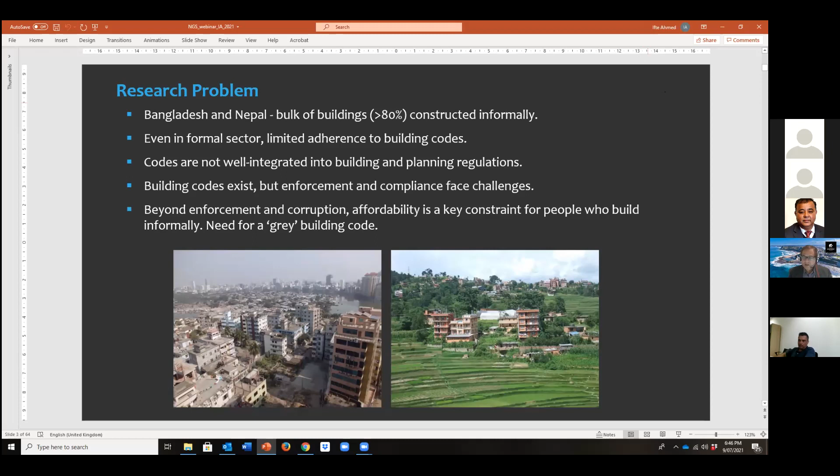So I will talk more about this notion. Our research problem was that if we now have the grey building codes, we were subscribing to what we call the safe building codes. The safe building codes focus primarily on reducing disaster risk. So if only the safe building codes are followed, forget about the rest - accessibility, green building features, electrical, fire, all that.

Fire perhaps belongs to the safe building codes as well, but water supply and other issues that come into building codes - leaving that aside for now - if you think of the bulk of people in our countries, if they could be supported to follow just the safe building codes, then they would have some disaster resilience.

The famous saying, earthquakes don't kill people, buildings do, comes into play here. Many of these disasters are not natural - I don't believe in the term natural disasters, because there are no natural disasters. All disasters are human induced in some way or another, because of our vulnerability, where we live and what we do.

You look at examples like Rana Plaza, many of you may be aware of it - the large garment factory in Bangladesh which collapsed in 2013. You can see the kind of damage, and more than 1,100 women, mainly workers, died inside it. It's about compliance - this building originally had foundations for 4 floors, and they built it up to 9 floors.

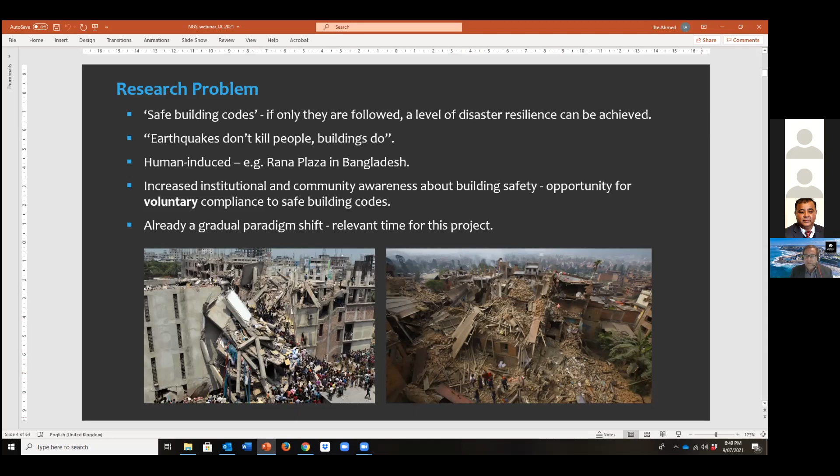This kind of augmented the awareness, and at this point I think there's opportunity for voluntary compliance, leaving aside the enforcement issue. Already there is some gradual paradigm shift, and people are following. There are certain municipalities in Nepal where there's voluntary compliance. From our studies, I believe Lalitpur had already done voluntary compliance, and recently Dharan and Timi, some of these municipalities. So you can fill me in more detail about these places in Nepal.

So why did we focus on Bangladesh and Nepal? Basically, when people talk about South Asia, they think primarily about India. Now India is a very different ball game from our countries, Bangladesh, Nepal, etc. First of all, overall South Asia has got low socioeconomic development, and the impacts in that region are profound. But what we started thinking is that the smaller countries have less capacity, less resources than the larger countries like India. So we started focusing on the smaller countries.

We had done more research projects in Sri Lanka, the Maldives, and Bhutan, and we put them all together into this new book, published last year. When we talk about disaster resilience in South Asia, we actually talked about these five countries. We didn't include Pakistan because of security reasons, we were not able to do any research there, and Afghanistan as well. But we could focus on these five smaller South Asian countries, which came out in this book, which includes Nepal. The case study in this book on Nepal builds on the post-disaster reconstruction work done after the Gorkha earthquakes.

One of the things is we started looking at some global frameworks. Globally throughout the world, many organizations are taking building codes quite seriously, disaster resilience quite seriously, from the Hyogo Framework for Action to the Sendai Framework for Disaster Risk Reduction. These have started being highlighted in the SFDRR and their framework, which encourage the revision of existing or the development of new building codes and standards. So that has become a priority in the global policy agenda. In the Sustainable Development Goals, again, support for least developed countries, including through financial and technical assistance in building sustainable, resilient buildings, utilizing local materials. So that is also quite important to understand.

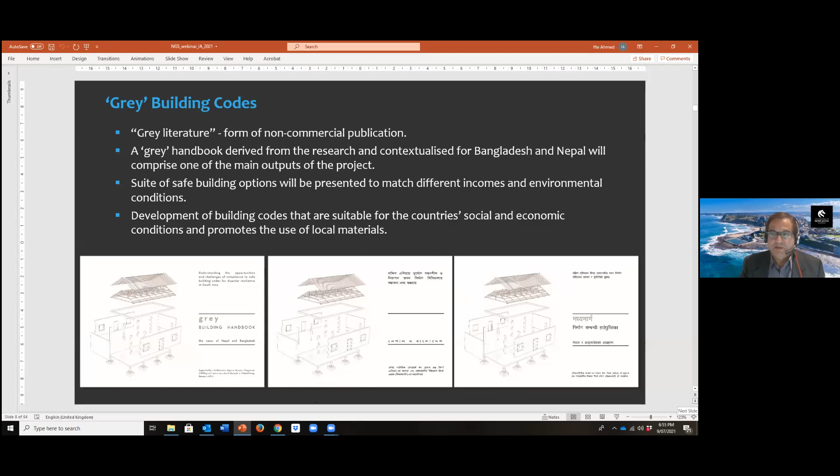So what is voluntary compliance all about? We are talking about compliance, but it is this notion that people become aware, they start believing that if they follow it voluntarily, it's for their own good. Think of it like being ill and needing to take medicine - if you don't want to have your medicine, then you get ill. So you know the medicine is actually good for you, you might as well have it. And so that is voluntary compliance.

So at night, before you go to sleep, you're supposed to follow the prescription and you have that. So that is the kind of idea we have - a very simplified version of the problem.

And the other thing is that the large bulk of the buildings are just all being done informally, whether you like it or not. And so the building code is very hard to enforce. It needs a lot of money to enforce it, to police it, and then in between there's all the subversion through corruption and all that kind of stuff.

So we need to find a very different approach to promote disaster resilience, and that is voluntary compliance. Voluntary compliance comes through awareness building, through knowledge transmission, through capacity building. So it's not only about forcing people to do things, not about enforcement regulations - it's a form of social transformation, if that's the word for it, where people have this compliance culture.

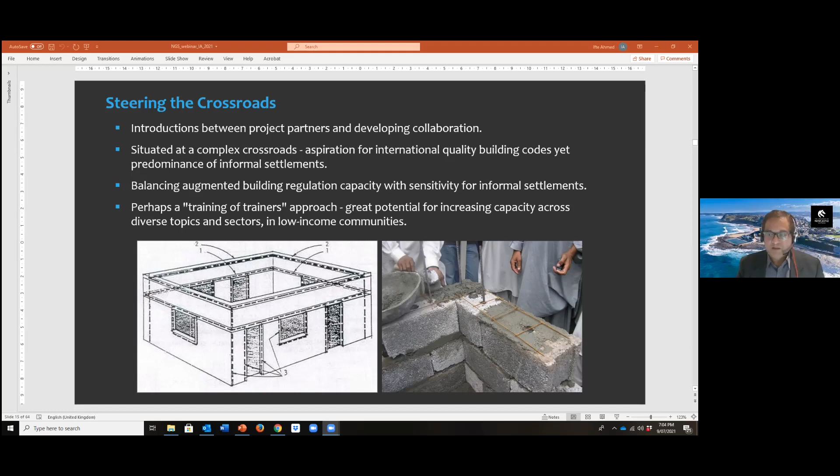Some of these ideas we had been trying to implement. This was a project we had done in Bangladesh and Pakistan after the 2005 earthquake - training of trainers for construction workers working on site, with hands-on exercises showing them the corner reinforcement technique. It was something very simple.

Awareness is one of the best tools for voluntary compliance, mainly in two aspects. One is on quality construction, design, drawings, and following the building code. That is one level of awareness, a little bit technical. Another awareness is basically the impact - what will be the impact if the building is not resilient or as per the building code. If we could do these two types of awareness programs for the people, they will realize the implementation of the building code. That means voluntary compliance.

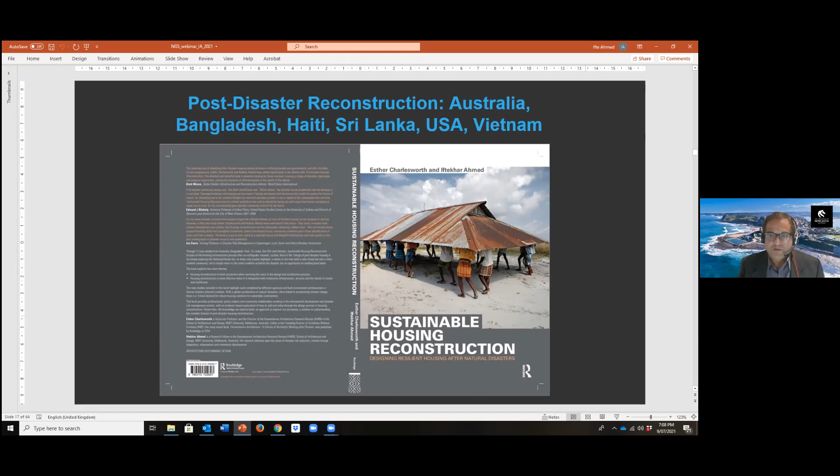This is a book that was published looking at post-disaster housing reconstruction in 6 countries, including developed and developing countries - USA and Australia, but also smaller countries. Nepal was not in this book unfortunately, and I've already talked about the disasters in South Asia book. This was also very important, as Inu had said, working on the ground, it's about community engagement. This is a book I co-edited with 13 countries from 5 different continents, covering the different aspects of how communities actually engage and even drive the process of post-disaster reconstruction and recovery.

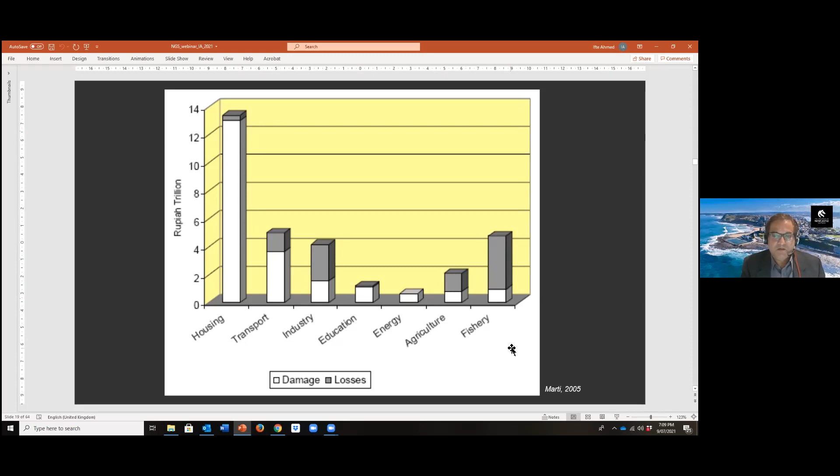So looking at housing, why is housing important? Why focus on housing? You might say safety, health is more important and all these other things. Yes, certainly. But this little study done by our good colleague from UN ECLAC, done after the 2004 Indian Ocean tsunami in Aceh, found that the housing sector experienced the maximum amount of damage, far exceeding all the other sectors - transport, education, and all that. So you can see this is such an important sector, and this is so vividly and tragically illustrated by the disasters that happened.

So looking at housing, we can call it sheltering. How do people shelter? Before a disaster, people build, extend, upgrade, they try to get money, cash, contract labor, self-help to construct and maintain their houses. Then they have the disaster, and beyond that, they will do the same kind of thing - over time they'll upgrade, extend, and build using cash and contract labor. So they will go back to more or less what they did before, unless there's some intervention. In that intervention, you start providing materials, cash, contract labor, self-help, and technical support. This is where the building codes can come in - where you say, yes, do what you were doing before, but maybe spend that little extra rupee to make it a bit stronger.

The other thing is about recovery and self-recovery. I'm currently doing a project on self-recovery in Vanuatu, a neighboring country, supported by CARE. In this project, what they found is that many agencies go and build housing for people and do all kinds of things, but people eventually are not satisfied. Things are not up to what they wanted. Agencies also have their limitations in terms of resources, time, etc., so it never matches. So many programs implemented throughout the world after disasters have met criticism.

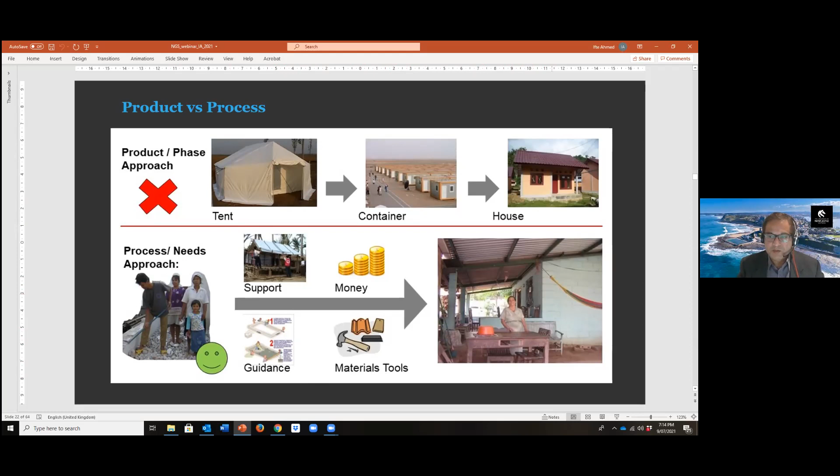So basically, it's just a little anecdote that you cannot fix a door to a tent. You have to be contextual. We have to understand where the problem lies and what needs to be done. It's not like just providing housing to everyone, a one-size-fits-all approach, but recognizing the diversity, the multitudinousness of the context.

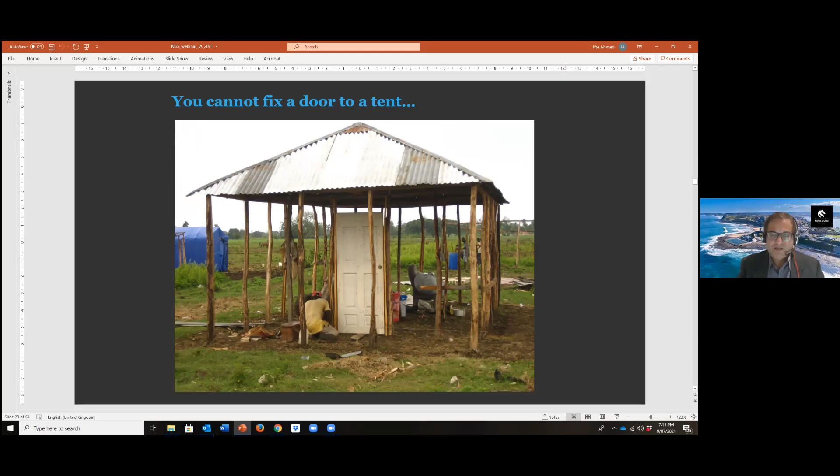Going back to what I discussed, the emergency transitional shelter issues, that photograph I took in Haiti in 2013, 3 years after the large earthquake there, when all these kinds of projects were built. The whole global NGO community descended on Haiti, everyone was there. Initially they provided tents, and you can see these tent materials have been draped around these transitional shelters. But I don't have a photograph to show here.

These areas consolidated and became urban slums, because they also didn't have services like waste management and drainage, so very unsanitary conditions developed. People were dumping garbage all around, and they were getting waterlogged and floods. But there was no way to get rid of these people, because the leap from the transitional shelter to the permanent house was far-fetched. When would it happen, and what were the resources for it?

My good friend David Sanderson, Ahmed knows him, he's written a very nice article called 'Lost in Transition.' That is what has happened in many of these countries with this idea of transitional shelter, and you may have equivalent experiences in Nepal as well.

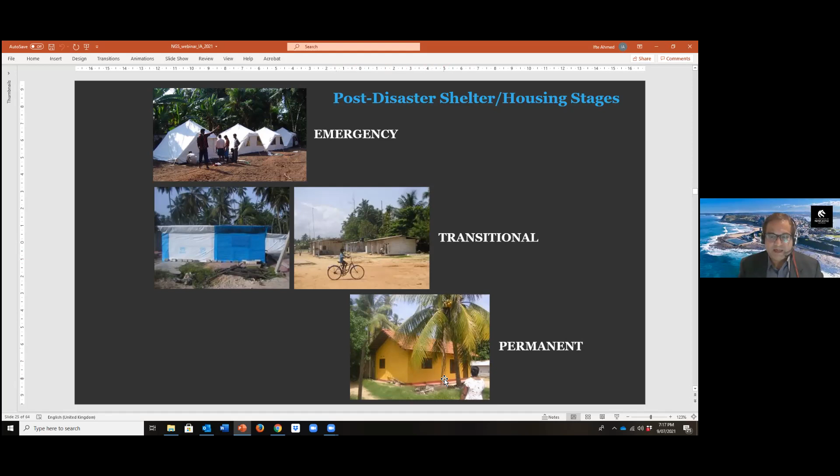It's a long process, this trajectory from disasters to recovery. It can take months to years. There are all kinds of temporary shelter approaches. As I mentioned, in Australia they're providing caravans, and some people are given vouchers to stay in hotels, but in poor countries they cannot get those kinds of opportunities.

So they get these in-situ temporary shelters or congregate temporary shelters, like that school in Bangladesh which was converted into a temporary shelter after a very large flood in 2004. People lived in that facility conversion - the school was converted, so the school kids couldn't go back to their school, and these people couldn't go back to their homes. They just kept on staying there for very long periods of time.

I'll give you some quick case studies. The first one is from Yogyakarta in Indonesia. This is a transitional shelter program, but transitional shelter need not be bad if it's thought about carefully. After the Yogyakarta earthquake in 2006, they decided to provide transitional shelter which can be gradually upgraded over time into permanent shelter.

You can see they'd built only the lower part of the wall. The upper walls were provided out of local materials, bamboo and other things. This bamboo was also very well built and treated, so it would last over the long term in case they couldn't make the transition to permanent housing. They salvaged a lot of the roofing tiles and provided the remaining ones to build these transition shelters. Many organizations did this - IOM, IFRC, and so on.

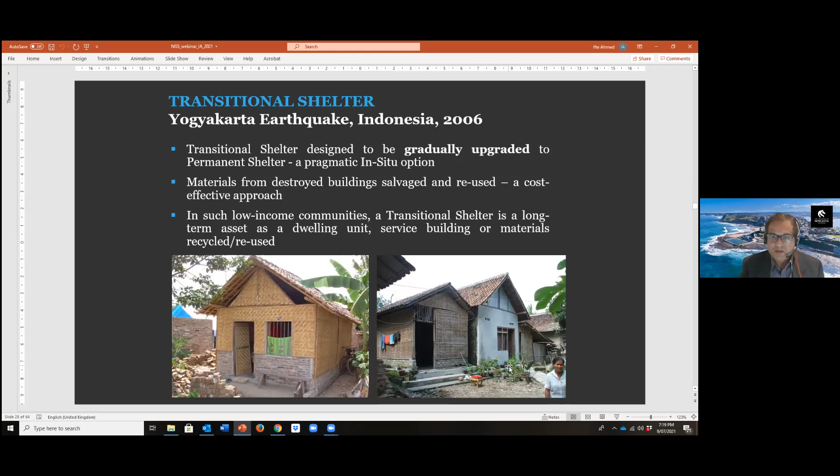Looking at a developed country like Australia, they had what they call temporary villages. This is a very uncommon idea, which was a great idea, but very capital intensive and difficult. Next month I have a conference in Australia where I'm going to talk about and question some of my colleagues in the DRR organizations there, asking why they don't build temporary housing villages.

In this particular idea, this was a sort of medium-term solution, equipped with all kinds of resources. I'll show you some photographs so you know what I'm talking about. They had everything - dining halls, kitchens, even a pet holding area, and pets are very important to people in this part of the world.

And so people could stay in these temporary villages close to their houses, and they could kind of supervise the rebuilding of their houses. They also had a building advisory service and a center. The building advisory service was dissolved after the temporary village ended. This kept the community together instead of all of them dispersing.

In many countries in the Western world, people get fed up and they just go somewhere, and the community loses its cohesiveness. In certain cases, in one of the villages, there were three of them built in Whittlesea, Marysville, and Kinglake. The one in Marysville is retained as a school camp.

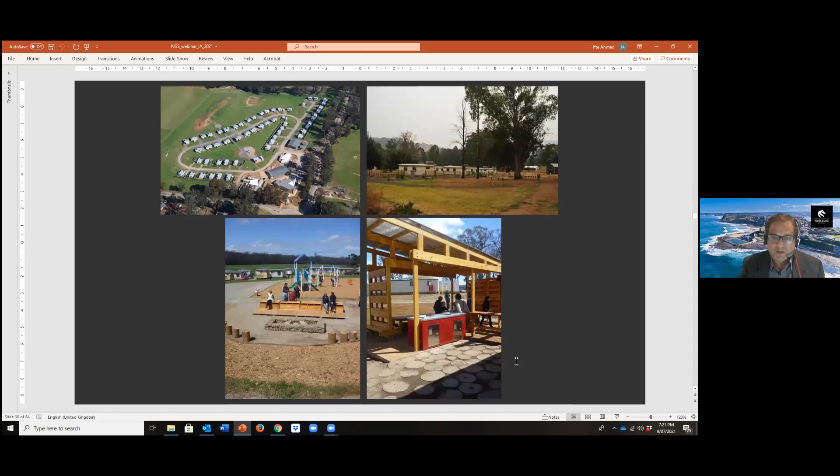Let me show you some photographs so you get an idea what I'm talking about. Here you can see the school camp, which was kept. These are very small little houses, as you can see - we call them granny flats. A granny flat is a very small house you can build if you have a large backyard, for your grandmother to live with you. They're just equipped with all kinds of things; it's a very small dwelling.

And this is what they had built. You can see the temporary shelter, which had an open area in between, and they also had a park. They had a barbecue center, built again by students from Monash University. You can see the building advisory service center, which was close by, and so on. They also had the dining hall. So it was all equipped.

After 18 months, this was all dismantled and left. In this particular photograph, it was completely dismantled because this was land leased from a farmer. But in the second one in Marysville, they actually kept it and allowed it to function as a long-term school camp.

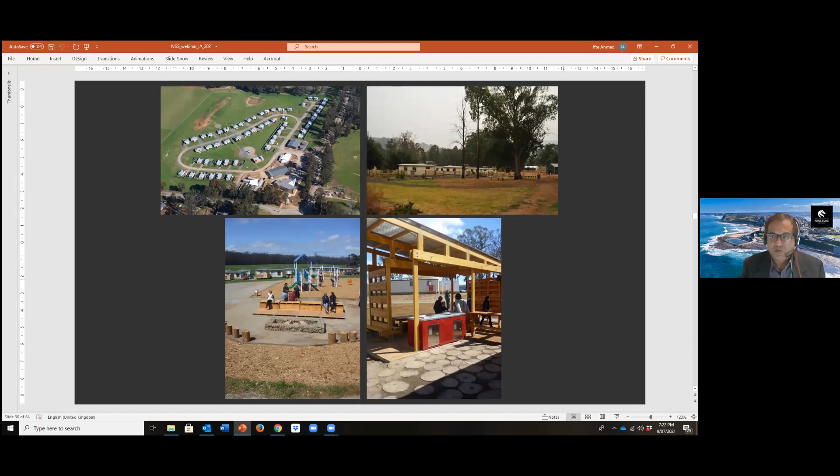So finally, we come back to housing and talk about housing recovery. I'm going to run out of time, so I'll just try to go a bit fast.

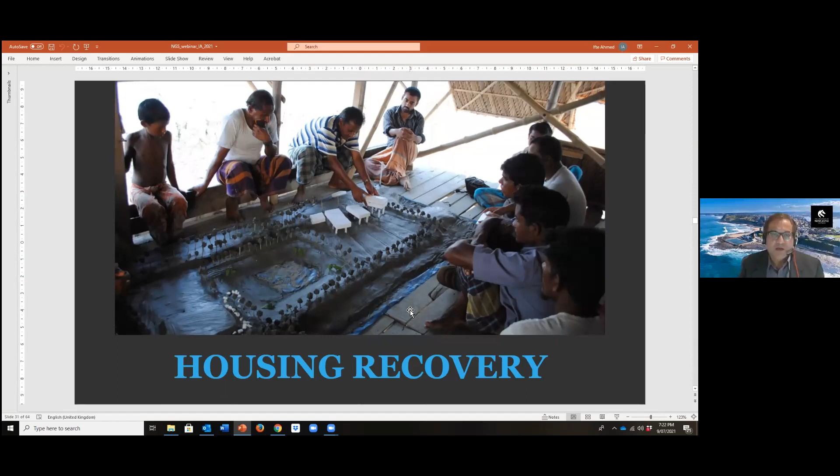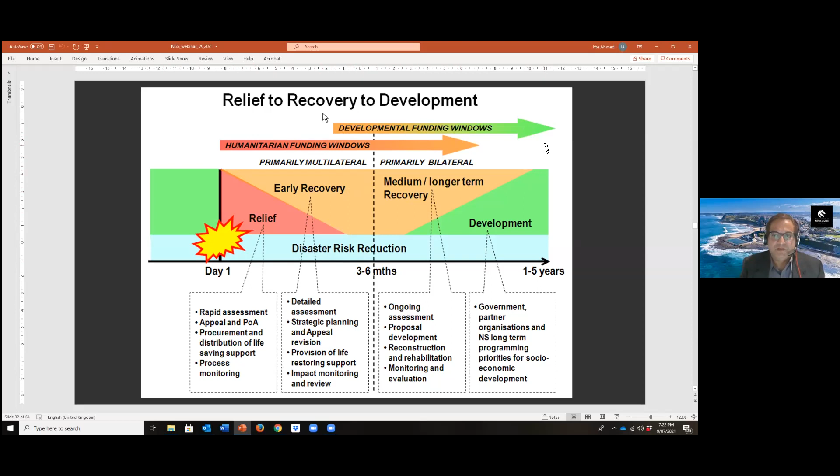Again, like I said, it's a long-term process. You have your day one, your initial relief, and two main funding windows. One is the humanitarian funding window, which kicks in after the disaster, and then the development funding window, which may have been operating before. After about 3 to 6 months, the development funding window takes over, and that grows, but this can take 1 to 5 years.

As you can see in this program - this is one of my favorite reconstruction programs in Sri Lanka, done by an organization called Foundation of Goodness, FOG. What they had done, amazingly, is that they stayed within the community. They came into being as an organization and have continued staying there and working with them - not a fly-in, fly-out humanitarian international NGO.

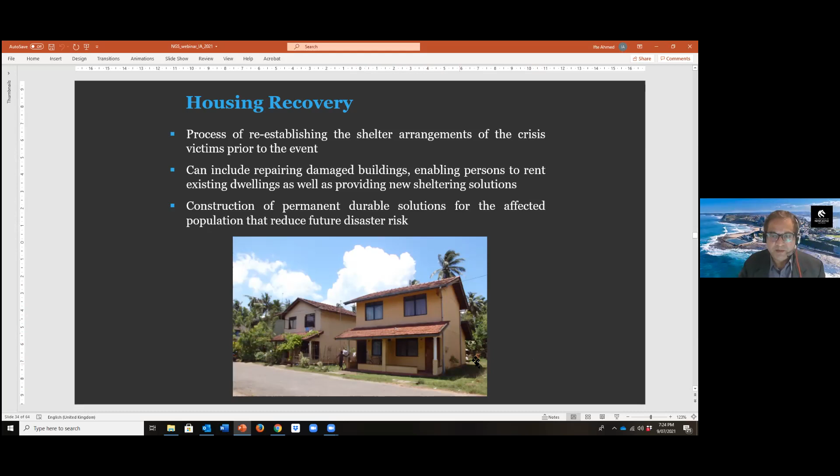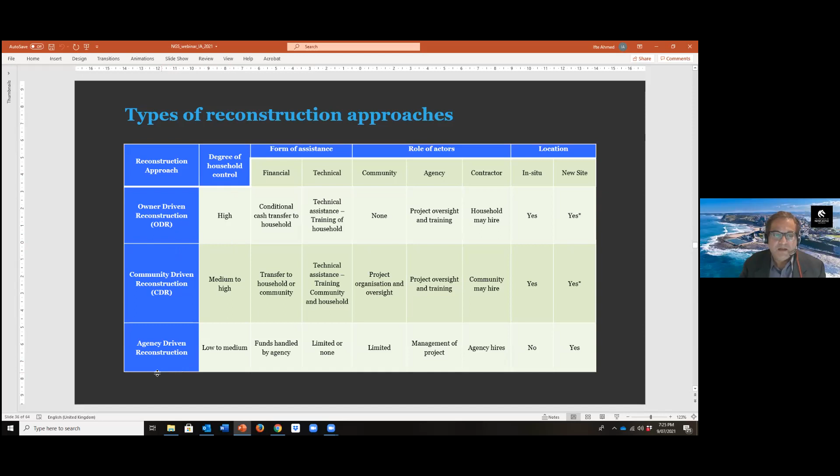Different approaches exist: the owner-driven approach, about which there's been a lot of talk of its merits; the community-driven approach, where the community works together; and the agency-driven paradigm, which is widely prevalent as well. I won't go into these in great detail, but one good thing is that the degree of control in the owner-driven approach is very high, while in the agency-driven approach it is low in many cases.

But I don't want to romanticize the owner-driven approach, because it also has disadvantages alongside its many advantages. Yes, people are satisfied with the eventual outcome, but people who have the money just spend it, or they might sell the materials they get. Quality control requires supervision, and people may feel overwhelmed or not have the right skills to participate, so a whole range of issues come up.

So we will have to balance the advantages and disadvantages every time a decision is made to take an approach.

There could be approaches that combine the benefits of both, a hybrid approach. This program is by CARE in Sri Lanka. As you can see, they had a certain design, but households could go in and change the design to a little extent through consultations, and they could supervise the construction work. This way all stakeholders could feel they had some sort of ownership.

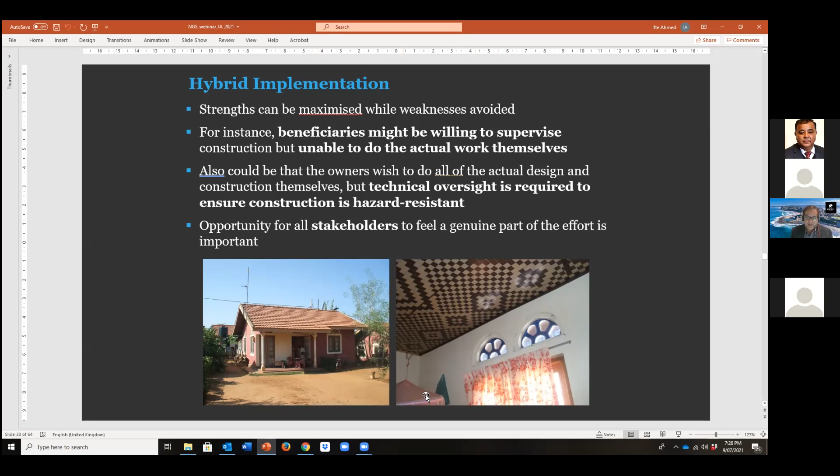In this photograph, the fan lights were included by the homeowner, because they said this brings some light inside the house - this is what we wanted. So they could influence some of the design decisions.

I probably won't have time to discuss that in great detail, but let me go on to another project in Bangladesh, where I was a shelter consultant - more than 16,000 houses were built after that very large flood I mentioned in 2004.

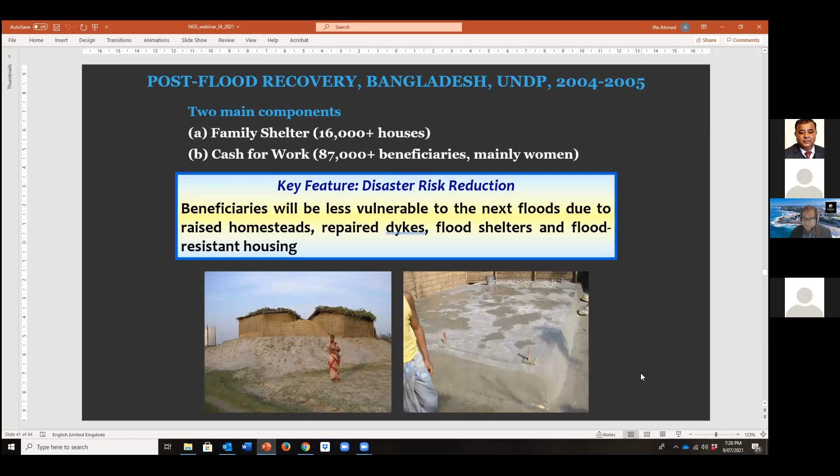I will show you a small video clip that will tell you what the program was all about: in the family shelter or house reconstruction program, we have tried to introduce techniques which would ensure risk reduction or make these houses less vulnerable to the next floods.

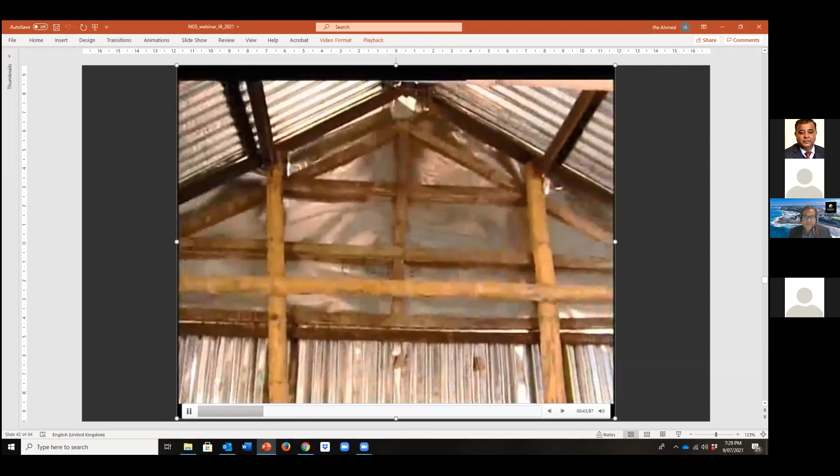Floods swallow up people's lives and livelihood. With their houses drowned, people take refuge on high roads, dams, or flood shelters. After the floods subside, a lot of them cannot find their houses since they have been washed away. To make sure that the houses of people whose lives are already difficult do not get washed away by the floods, model houses have been built in various project areas.

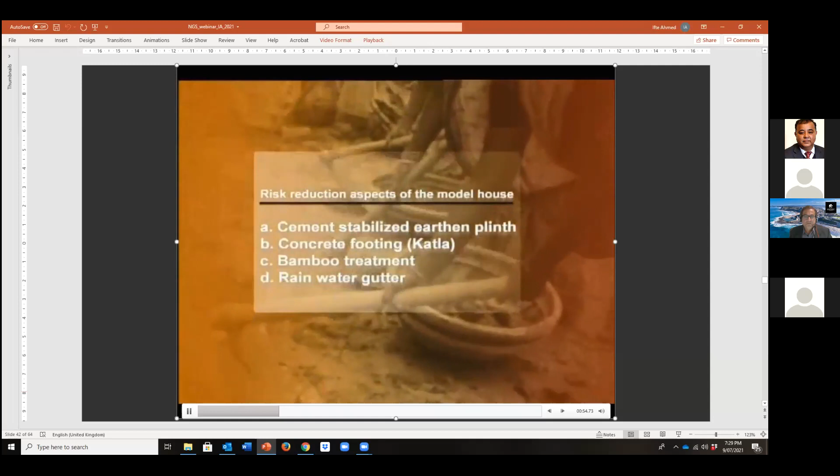Risk reduction aspects of the model houses include cement stabilized earthen plinth, concrete footing, katla, bamboo treatment, and rainwater gutter.

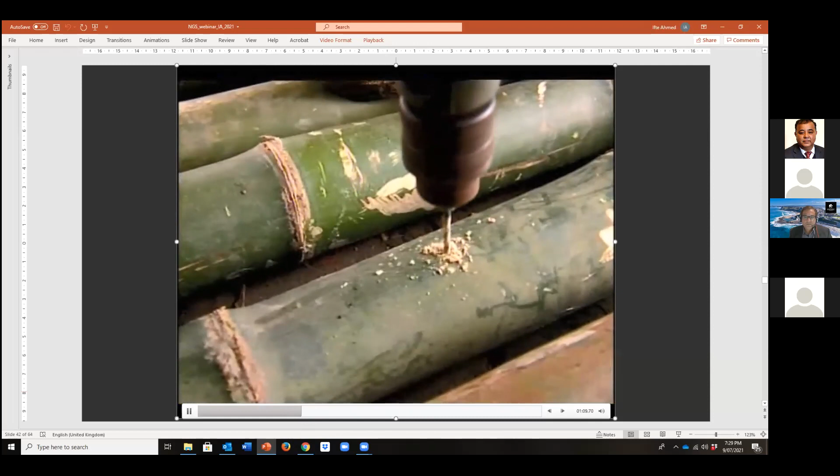Treatment of bamboos is one of the distinguishing features of this project. This protects the bamboo from insect attack and rotting. For the footing of the bamboo posts, the katla is made through local initiative.

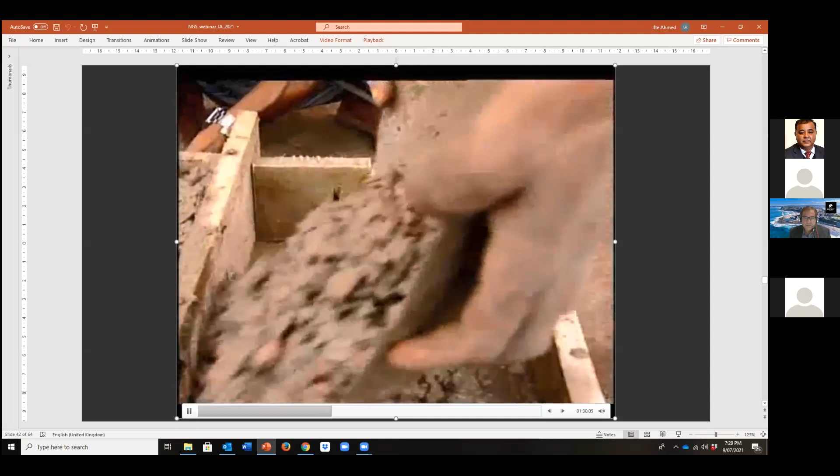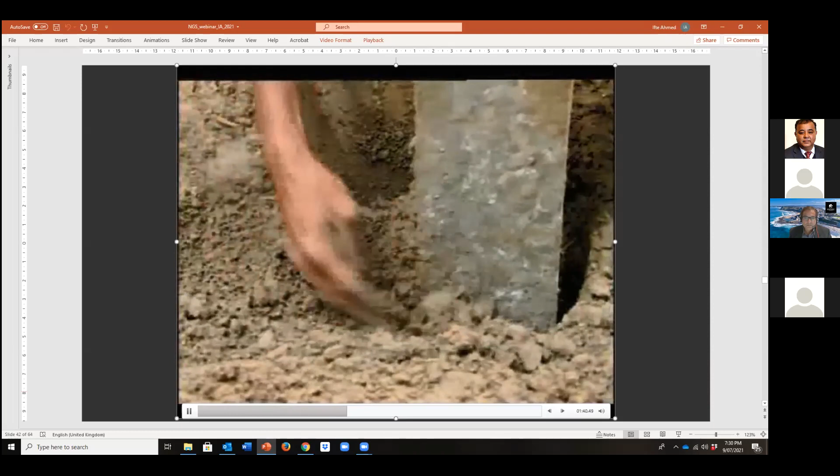A soil and cement combination in the ratio of 19:1 was used for capping the plinth of the house. This prevents the plinth from being washed away.

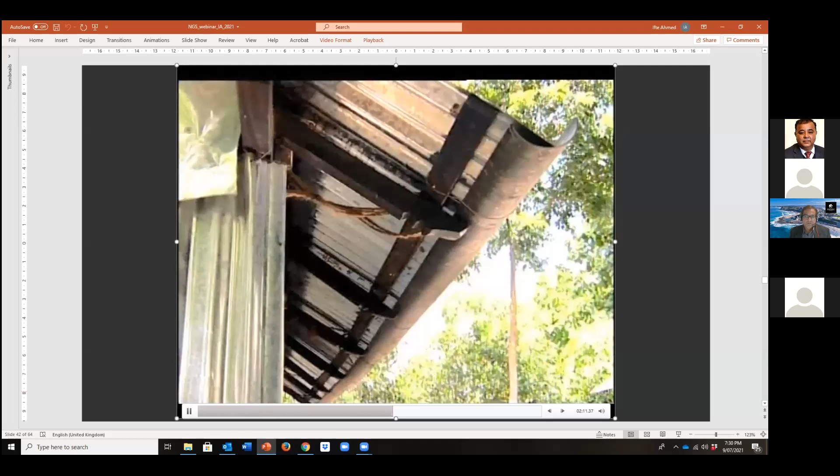Rainwater gutters made of split PVC pipes are used to prevent rainwater falling from roof eaves and damaging the lower part of the house. It also provides an alternative supply of arsenic-free water for household use.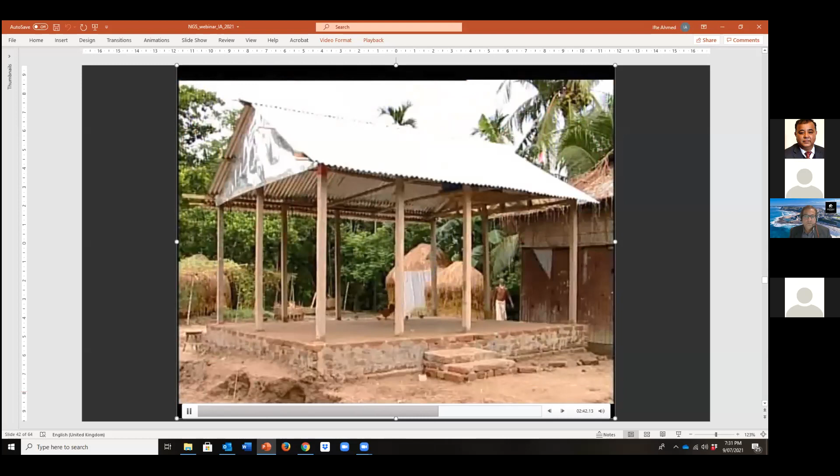16,036 houses were built in 23 districts under the housing project for the flood-stricken people. The houses differ in shape and structure in different areas depending on the quality of soil and easy availability of materials. In some areas, instead of katla and bamboo, concrete pillars made of rods and cement are used. Again, in some areas, instead of bamboo fences, metal sheet is used. No matter what material is used, it is made sure that the houses are resistant to flooding.

Certain criteria are set before nominating the people who are eligible to get the houses. The chairman of the Village Development Council plays an important role in this regard.

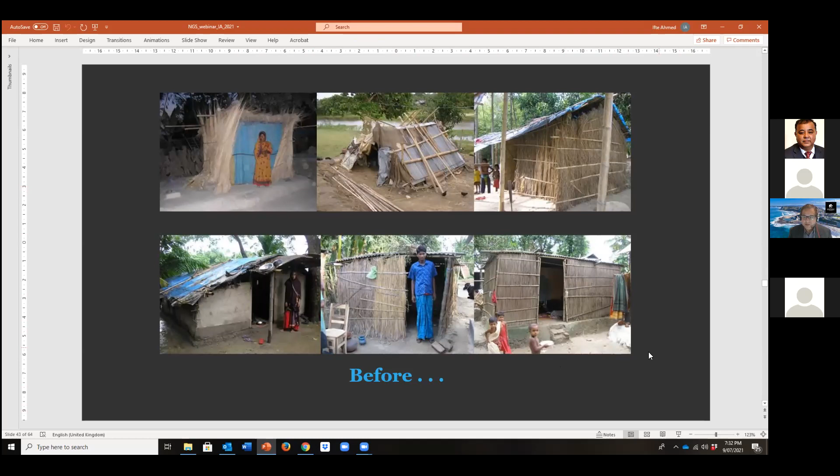And yes, you may call this self-recovery, but this was the condition. And then you can see that even though it's a modest house, it's definitely a leap from the previous conditions that people were living in.

And again, not following a one-size-fits-all approach. In this particular project, what we did was we provided specifications of certain kinds of materials, but they could have their own design, their own ideas, the kind of houses tuned to the different localities, locations, the areas, so that they use local resources and in tune with the local environment.

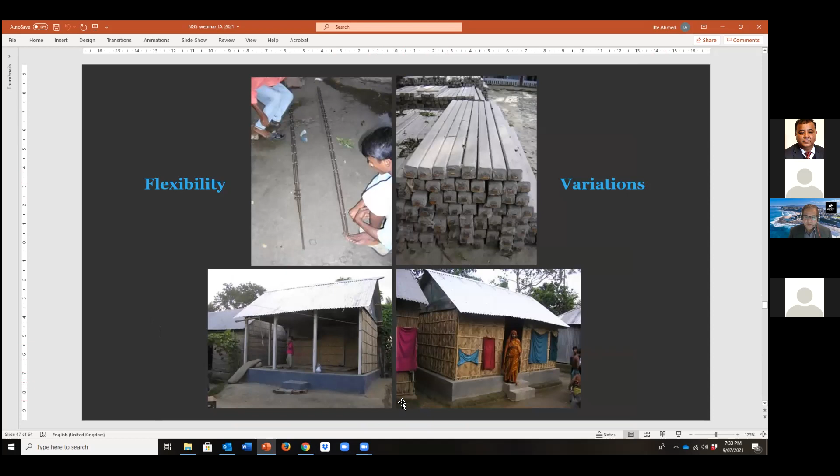And then the idea of flexibility, that they could have variations, they could use materials as they chose. Some people wanted to use concrete posts, as you can see, instead of the short concrete stumps that we provided, and so on. So you can see the variation and the variety.

And yes, that's what I meant. Instead of treating bamboo with the kind of ideas that we gave, we didn't use any toxic chemicals either, just local oils. But here they just got sap from a certain kind of tree, local to the area, that helped protect the bamboo.

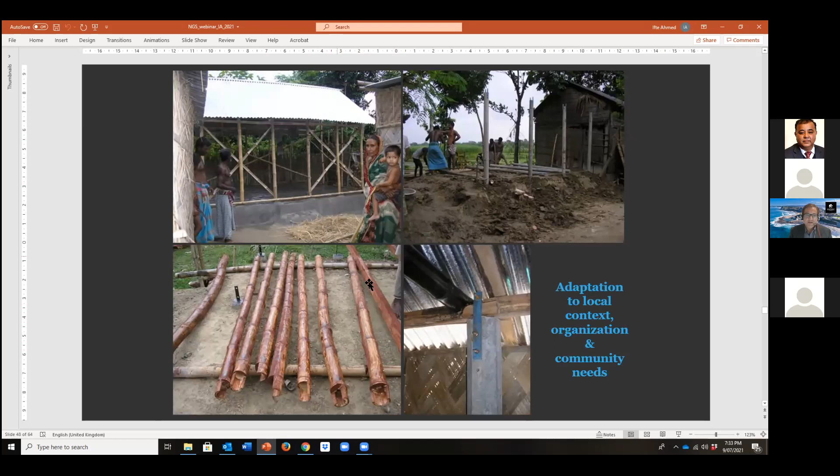So you see, they introduced cross bracing in certain areas because of the strong wind in that particular location. And this kind of project, 16,000 houses, generated employment for a large number of people who worked on the sites: building material suppliers, transporters, people supplying materials from one side to the other.

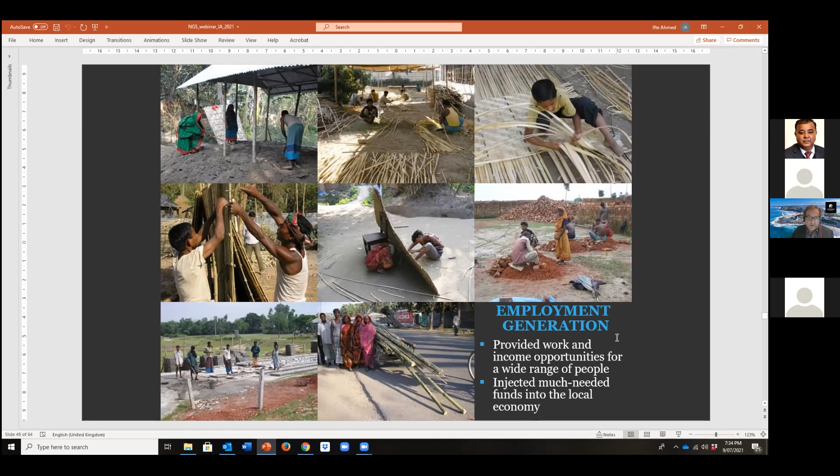So there's a lot of potential, like any other thing, it has got its problems and its potential. I won't go into great detail.

Cost effectiveness, they can build in local context, can be easily replicated in training. But on the other hand, there are many problems in the beneficiary selection process, and also the project planning, and some of the NGOs were also not very honest. And the quality control issues, this is always very important, needs local capacity building.

But this project also had a very long-term impact, and I had written about it in my community engagement post-disaster recovery book, which I showed you earlier, that some of the partner NGOs started using some of these ideas, and they had replicated some of those ideas in their training handbooks.

And here you can see the treatment of bamboo process, that they drill a very small hole and pour local oils into it. It could be anything, diesel, kerosene, whatever. And they were doing it in the Rohingya refugee camps in Bangladesh, and also after 2007.

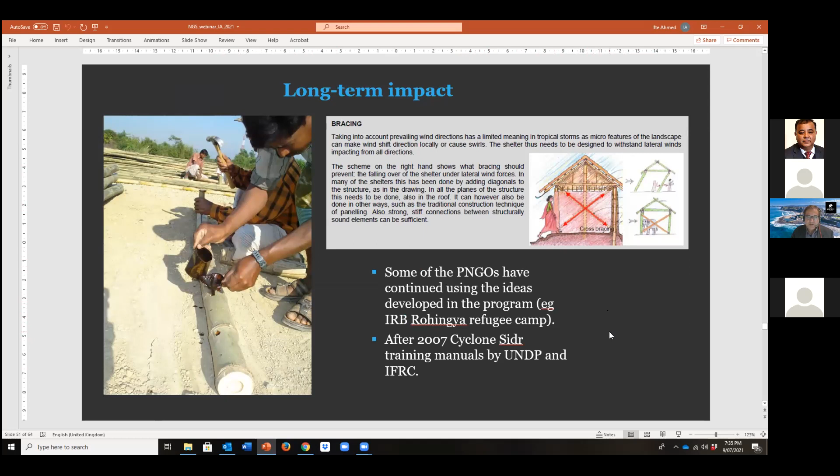So now things have changed. This project was done in 2005, and now Bangladesh has developed more. There are more brick buildings, larger houses, and all kinds of stuff.

So when I went back to one of these areas just quite recently, I found that those smaller houses had gone, and they had built very, very large houses. But they had used some of those materials, and they salvaged some of the materials. In fact, that particular juncture in time, when they got that support, helped them stabilize. Otherwise, they would be in a floating condition. It helped them stabilize to move on to long-term prosperity.

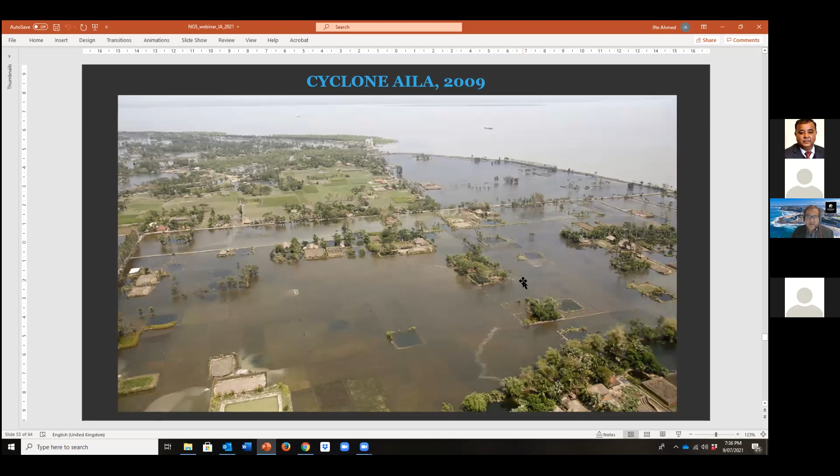So I can give you another example, Cyclone Aila, 2009. This was done again by my colleagues from Brac University, which Ahmed mentioned right at the beginning. In this particular case, it was a reconstruction project in southern Bangladesh after the cyclone and inundation for more than two years because of the storm surge. This was an agency-driven and owner-driven kind of hybrid approach.

The houses again were elevated because they had the trauma of the storm surge, even though they filled in at the bottom, the living quarter was upstairs. They had a whole range of things - livelihoods, infrastructure, education - all integrated together in the project.

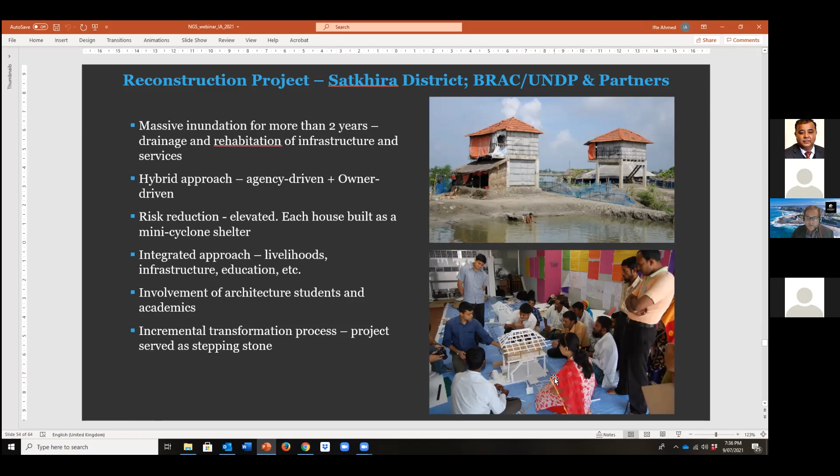Here you can see the architecture students working with the local community members in developing house designs which were appropriate for them. You can see some of them actually working on the ground. This is the main architect, Kabir, who worked on this project. And this is the school that was built.

So it's not just building houses, but it's a large community. You can see that some of these houses extended over time as well. If you go back, people have been investing. They had made homestead gardens and planted trees and made it much more habitable. So once people get initial support, they maximize it and start investing on their own, making wonderful environments. Nothing really happens without the community - the community is the most important central part in efforts such as this.

So let me go into your part of the world, looking at the Gorkha earthquake, Nepal recovery. This is an article we had written very soon after we came back in 2017. I won't go into great detail - it was also written by Haridarshan Shrestha, who joined us in writing this. What we found is there were all kinds of problems, even 30 months after the earthquake.

Only 12% of the 400,000 houses that were to be rebuilt, with 4.4 billion in international aid that came in, very little had been disbursed. There were all kinds of problems - payments were dependent on compliance with building codes, and people who didn't have land could not access these programs. You're more familiar with these than I am, so I won't go into great detail.

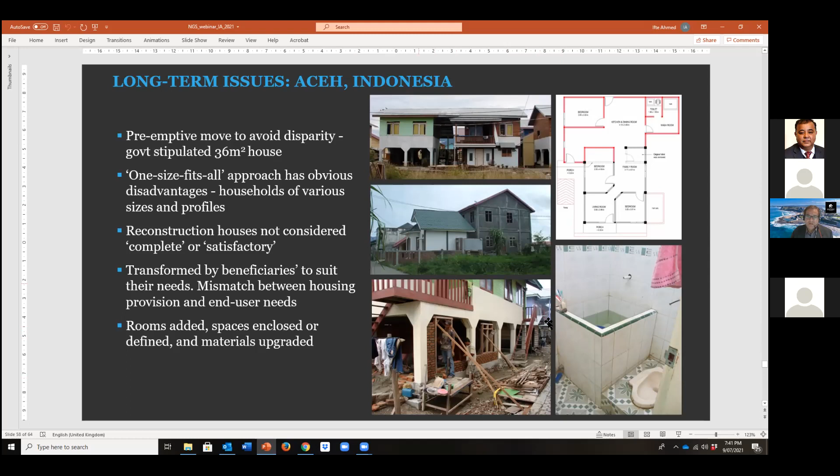There were cultural issues also. The agency envisioned a westernized idea of having a toilet inside the house, but people demolished those toilets and converted them because they have two different bathrooms. One, because the water usually comes from wells outside, so they have a pure area and a polluted area. The polluted area is the toilet, where they have a different tank, where the washroom has a different tank, especially because they also perform ablutions for prayers. So there were cultural factors involved in this issue.

Looking at the Maldives, very similar, a one-size-fits-all approach was done in this particular project we look at in Dhuvaafaru Island, a safe island program. People needed extra space for fish processing and had to do all kinds of things. They had to have livelihoods, so they extended the front and converted them into small restaurants. This one became a two-story house from what the original house was. You can see the original house there in the back.

All kinds of issues, waste management issues come in, environmental issues come in. People wanted jobs, they couldn't live on that island, so they moved. These are very big issues. It's not only just building houses, but dealing with the whole gamut of issues that need to be addressed in an integrated way.

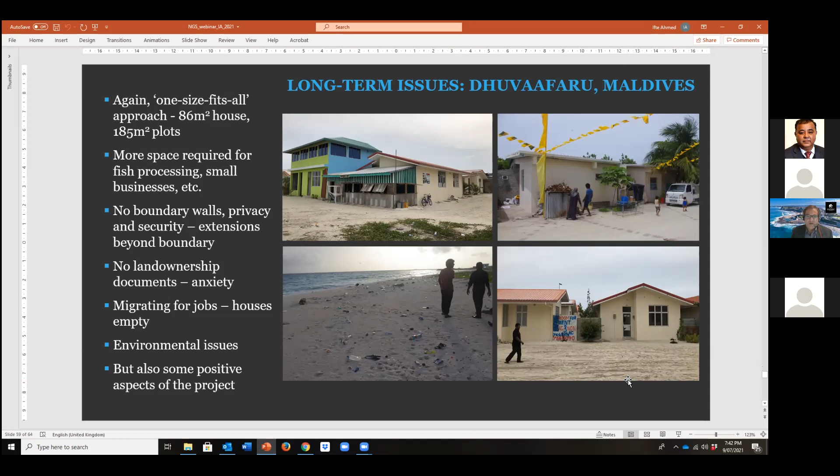India, and again, long-term issues. The government, under the guise of the so-called Slum Clearance Board, cleared up all the slums, small shanty towns of fisher folk living on the coast. They got them to move inland and cleared up that land, and gave them multi-story walk-ups, 4-story walk-ups, with very small apartments, 22 square meters, one room. As you can see, this is what it is, with just a small toilet and a kitchen alcove. How can people live, especially when they have large families?

So they started having all kinds of problems here. Construction quality, again quality control is a very big issue. You can see the poor quality of construction that became apparent. People needed livelihoods, employment, and so there are all kinds of things. Many of these houses were eventually sold, and people went back to their coastal locations and built shanties.

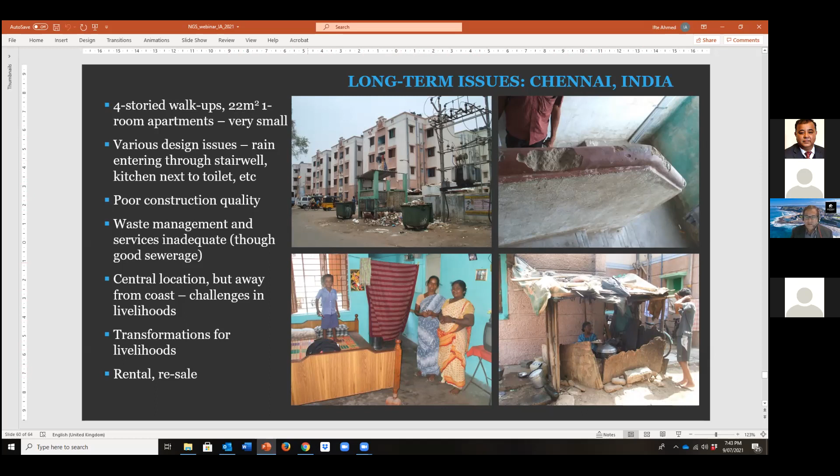So giving you an overview, just to try to capture it all, the key elements of effective reconstruction: one is integration of housing with community infrastructure. I've talked about integration quite a bit. Livelihoods, very important, especially the local economy, injecting funds into the local economy through the reconstruction process.

Sustained engagement, I talked to you about the Foundation of Goodness. Here's a photograph from one of the projects with the Foundation of Goodness, where the agency decided to support the community over a very long time, multi-stakeholder engagement, different ideas, different groups, different people coming in and doing things, each bringing in their own specific contributions, but at the same time, differing aspirations that need to be negotiated.

Built environment professionals need to come in and give the technical support. As the community had been doing things for a very long time, but at this point, there needs to be a synthesis of external technical know-how with the local indigenous knowledge bank. And then how do you implement in difficult contexts, very far remote areas, the hilly mountainous terrain in rural Nepal, how do you actually implement it? These kinds of issues need to be taken into consideration, and once that is done, then you have your effective reconstruction.

I think of paramount importance is the building back better and safer part. That is where your building codes come in, adding a little bit of an extra element, a safety feature, raising the house above the water level, having extra cross bracings, all of that matters. Post-disaster reconstruction opens up this window of opportunity to incorporate building codes and do things better than they were before.

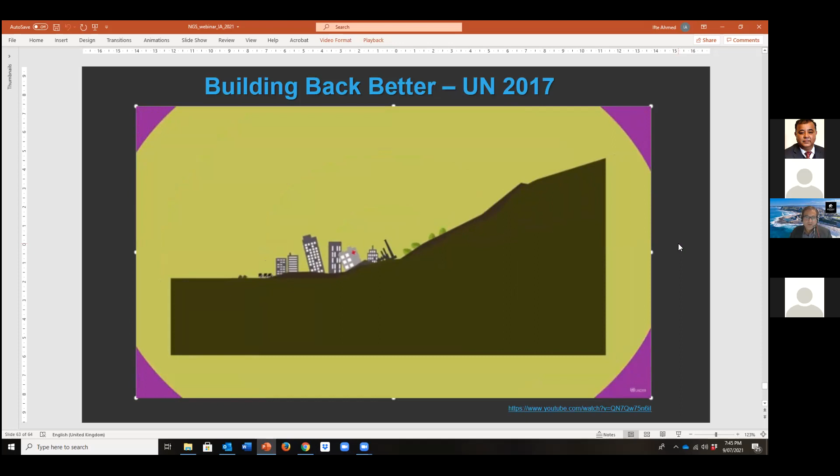In the aftermath of a disaster, a robust recovery plan that puts the needs of communities first will ensure minimal disruption and save lives.

Pre-assigning resources and operational tasks before a disaster takes place will ensure that reconstruction can begin as soon as possible. Community needs following a disaster must be immediately attended to.

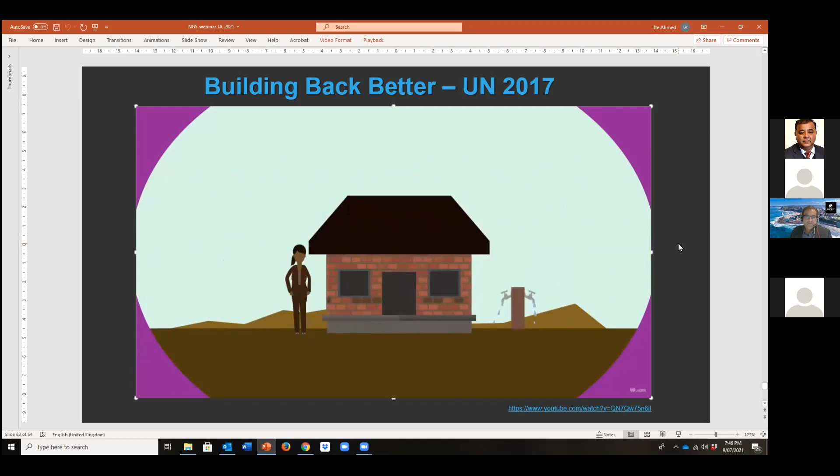Clearing stricken areas provides an opportunity for thorough reassessment of risks and to build back better and more resilient. Integrating disaster risk reduction and community improvement measures into the rebuilding process helps communities in the short term, as well as reducing future vulnerabilities. Together, we're building a more resilient world.

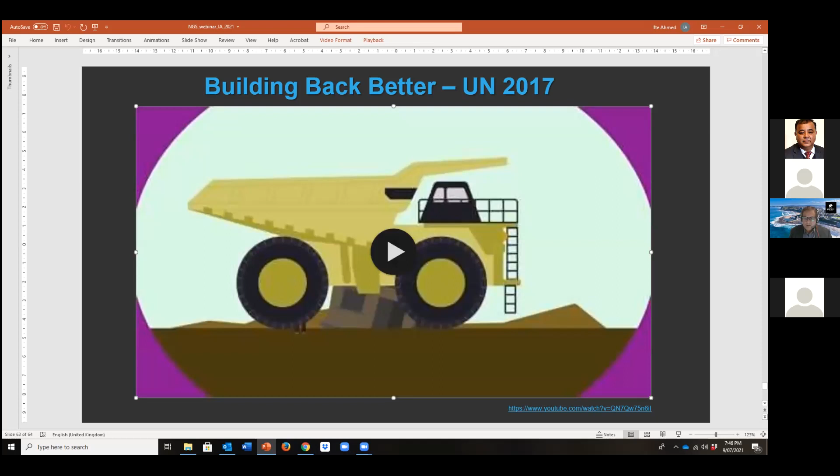Thank you very much. Can you please remove that, or let it be there. Never mind, I can share. Thank you very much, that was a wonderful overview, a wonderful excursion, almost to all continents. I never knew you had such wonderful experience everywhere, and more specifically in South Asia, so that provided a very wide overview.